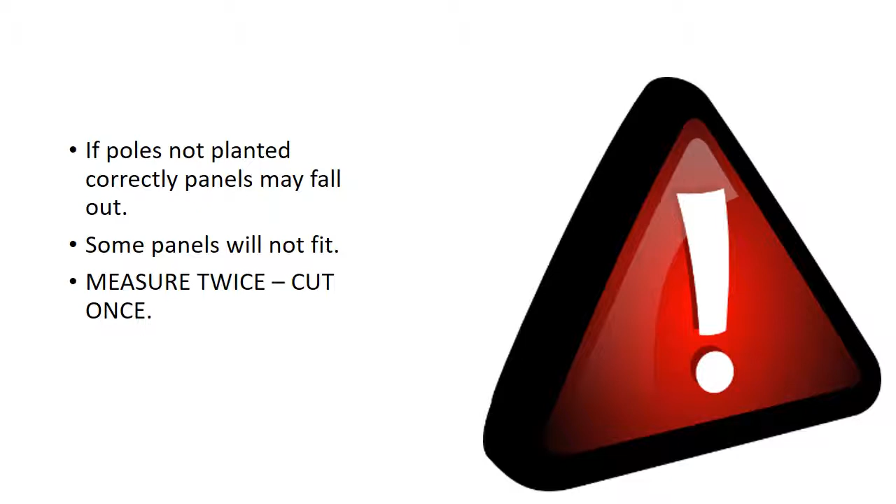Working with the poles and positioning them is very important, because if the poles are not planted correctly, the panels may fall out later, some panels will not fit. As the saying goes, measure twice, cut once. This applies here also.

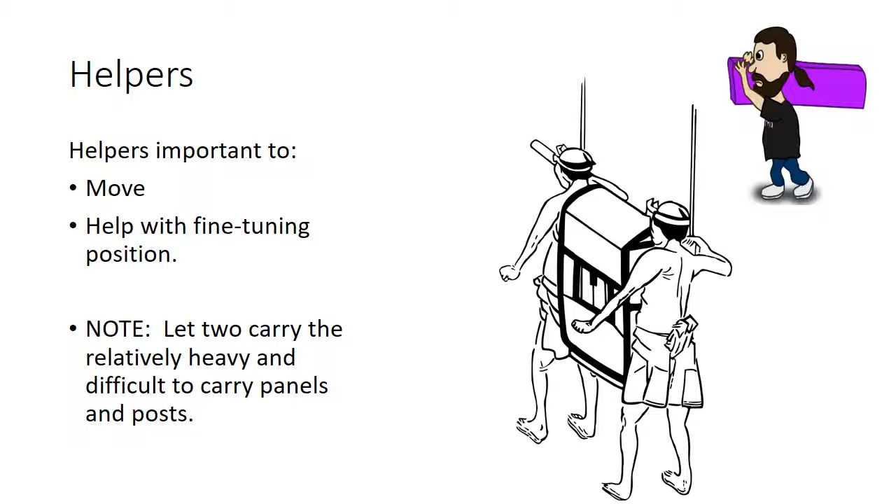Helpers are very important, because the poles and the panels are relatively heavy or difficult for one person to carry around and use. So have a helper, it's better for two people to carry it.

Note that you do need gloves if you're not used to working with it. Gloves are a very good thing to cover your hands for any small injuries that you can get.

Plant poles in a straight line - this is only a half truth, because you do not need only things to be in a straight line, you also need the poles to be at the same height.

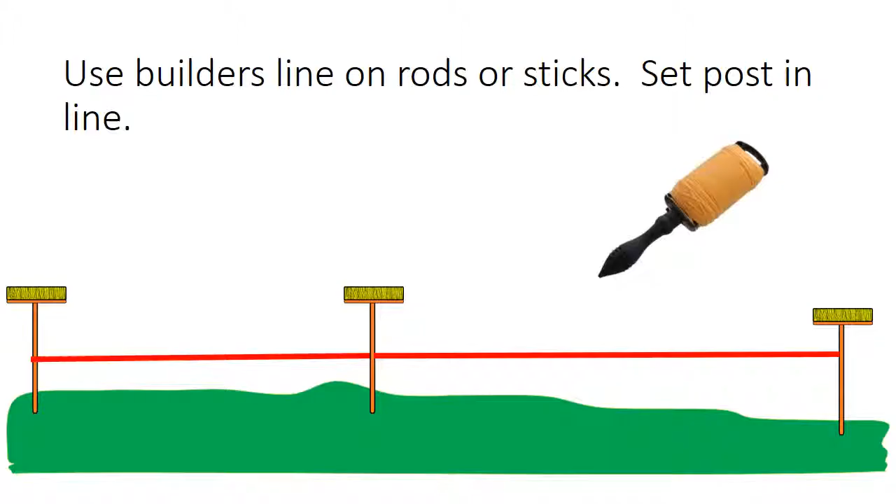To put poles in a straight line, just use rods or sticks at the end, and then you use a builder's line to connect it and plant the poles in that line.

To have the poles in a straight line and at the same height, this is more important for you. The highest pole and the lowest pole with builder's line on top, and then this will align the heights of the pole.

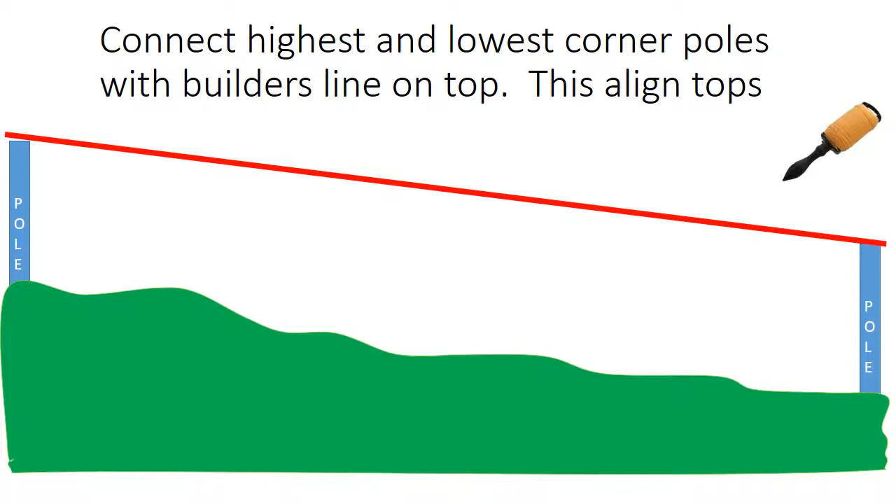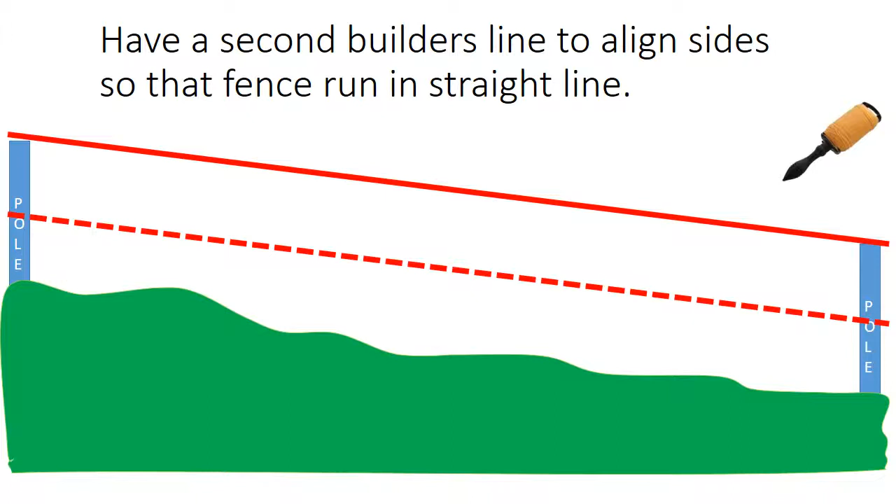Run builder's line on the side to keep it in a straight line.

How do you check if a few posts are at the same height? For 2 or 3 posts, you choose your spirit level, and if it's too small, you just use a long plank to put on top, and then you can see if it's level, one pole with the other.

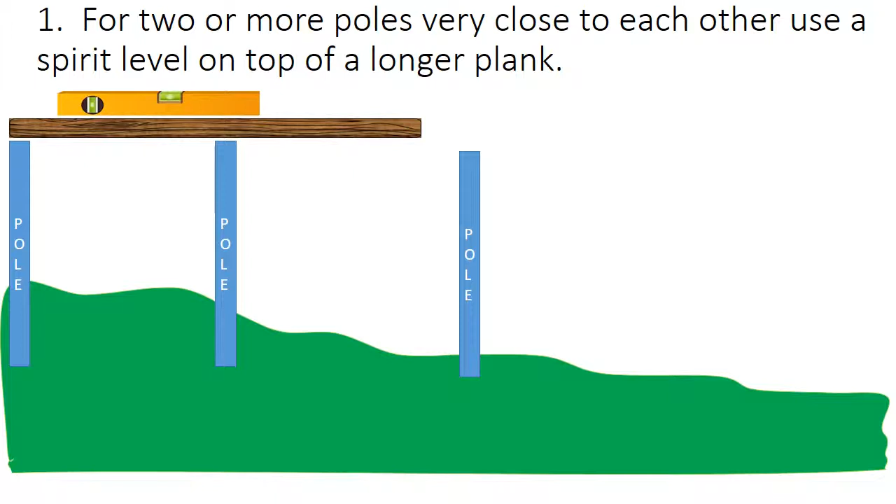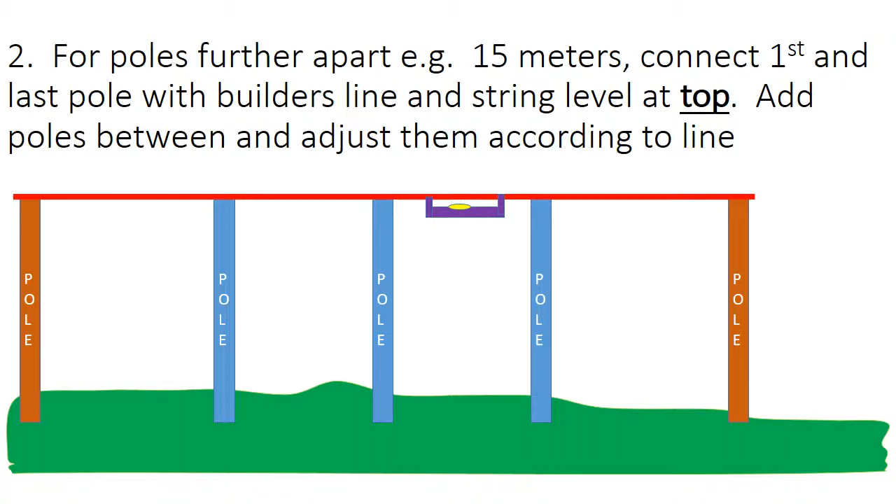If the poles are a little bit further apart, maybe around 15 meters or so, use a string line level that you attach to the string. Don't put the line closer to the bottom, to the surface, maybe at the height of your first panel. You just put the builder's line then with a small string level between the 2 points.

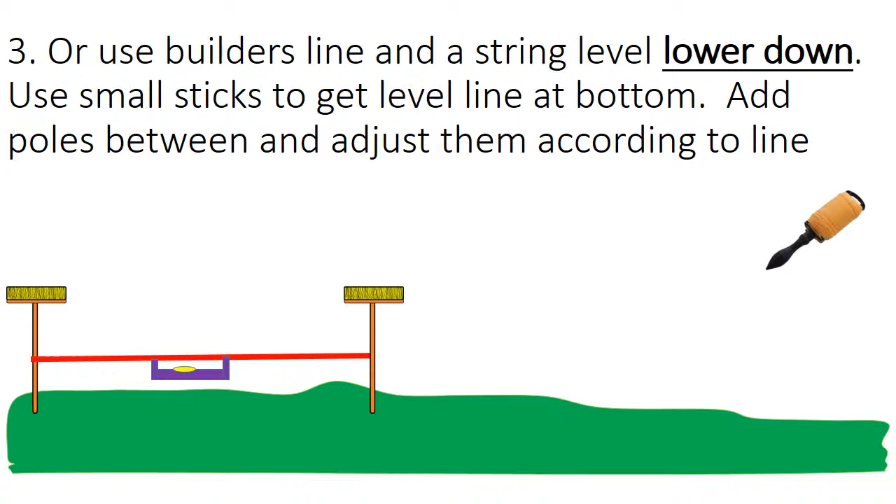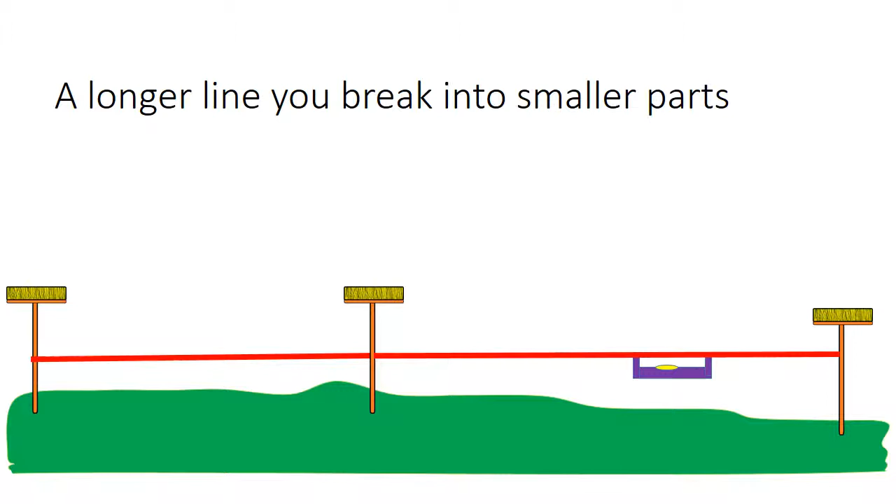If the section you need to measure is very far, first break it into a manageable part, level that first part so the line does not sag. Add another section with a pole, so that you can have a long line that is level, and you then level it piece by piece.

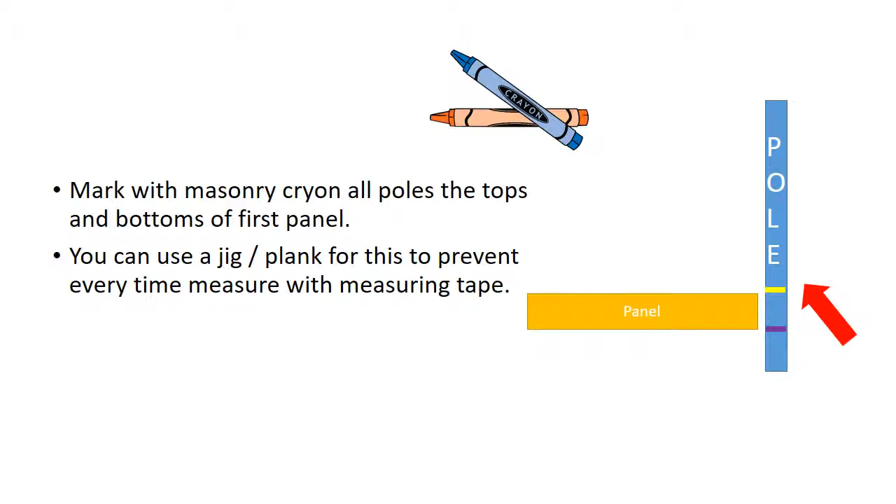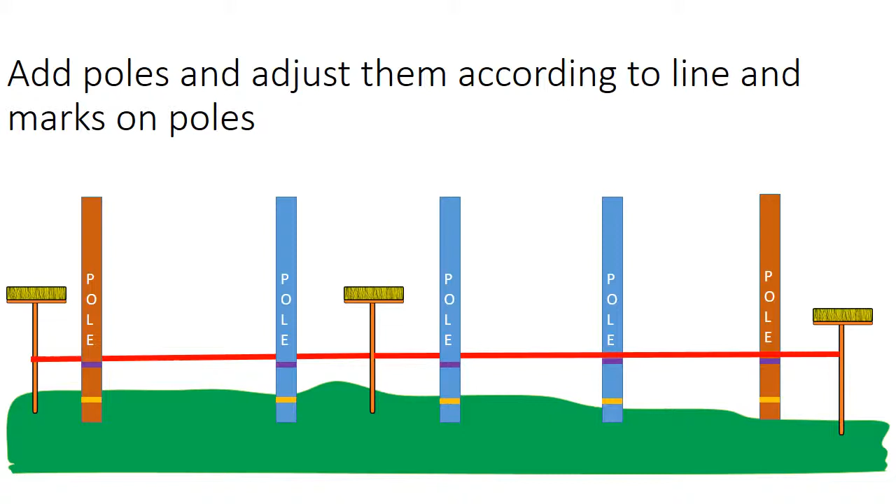All you then do is add the poles and adjust them to the marks, the top mark of the pole. You align the top mark of the pole with your leveled builder's line - sometimes people use fish gut also here. The line that you add, you simply adjust the top mark to that line.

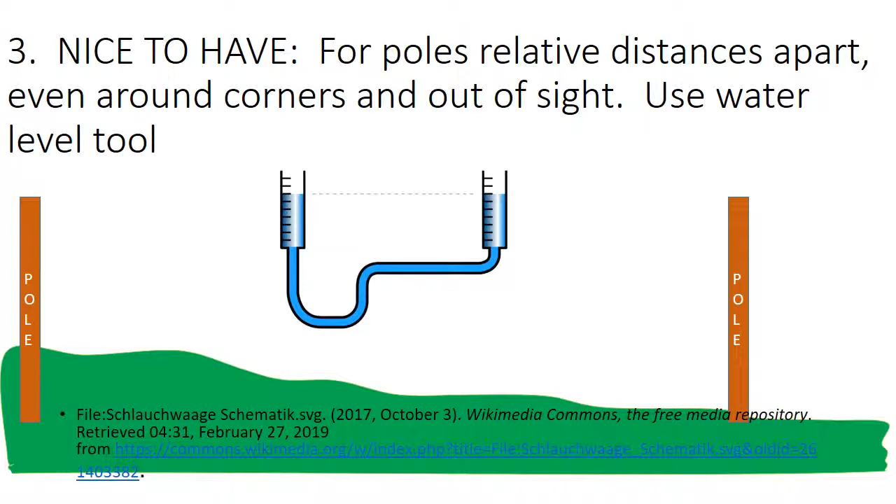A nice thing to have for leveling the poles, especially if it's far or sometimes even around a corner, is a water level tool. You can read a lot about it, but this is a really simple tool, not too expensive if you compare it to the digital tools.

Now, to plant a single pole to the correct height, everything starts before the planting. You can't put a heavy object in any type of hole and then expect wonders to happen. Things start at the beginning.

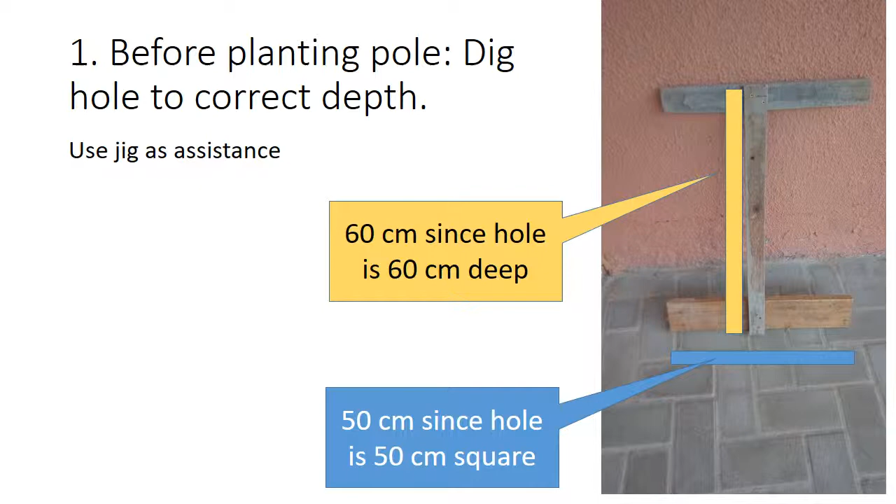First thing is you plant and dig the hole to the correct size. You can use a jig for this. If the hole is to the correct depth, you have already achieved a lot. In this case, I need to dig the hole 60 centimeters deep, so I make the jig 60 centimeters.

Before you plant the hole, make sure that the distance between your builder's line and the bottom of the hole is slightly longer than the distance you measured out at your post or pole, where the top of the first panel comes. The distance must be slightly longer.

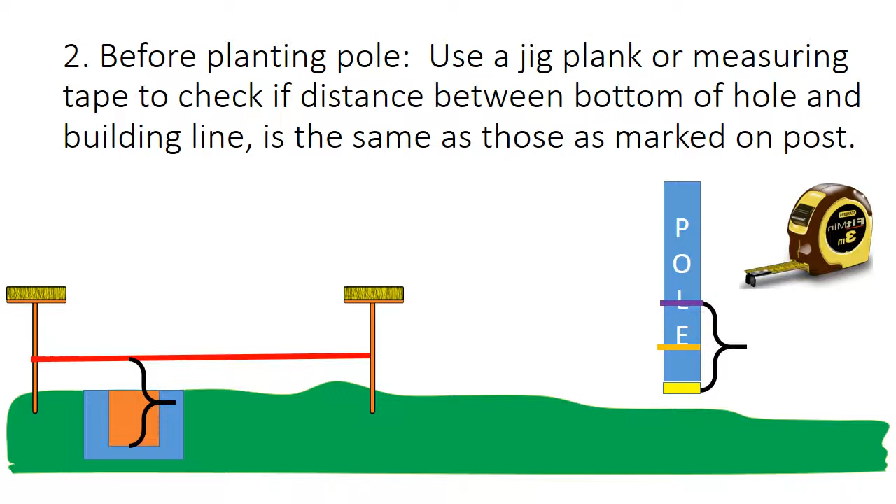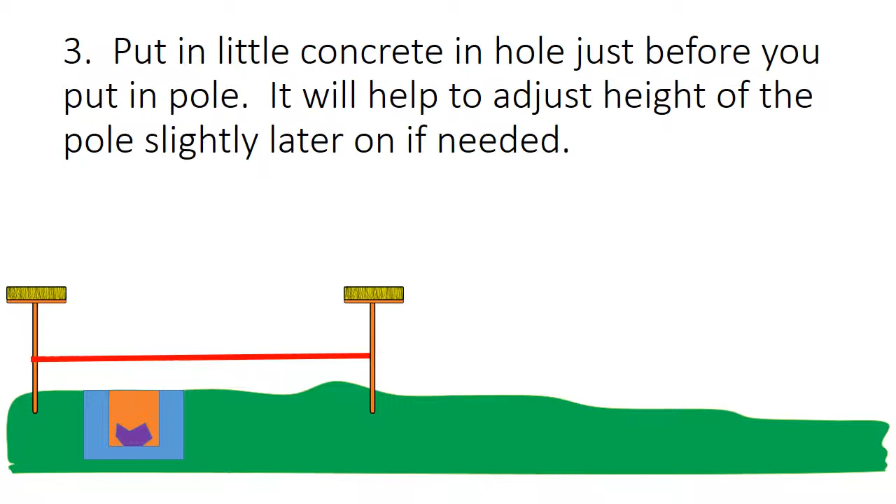As I said previously, I budgeted for 10 centimeters more. The reason is that you put a little bit of concrete in the hole first. This will help you adjust the height of the pole slightly if and when you need it later on.

The best way to put the pole in the hole - before we continue with how to adjust the pole in the hole, let us focus on how to put the pole inside the hole.

Slide the pole parallel to the builder's line, and slide it in close to the edge. In fact, you slide it in against the panel. Remember, you put the concrete at the bottom, just at the bottom.

Now you slide the pole in at the side, bring the pole in, and then when it slides against the end of that panel, as you push it, it will come upright.

Now you have it at a leveled distance. So you start with that. The fact is, now you will have to get the correct height of the pole.

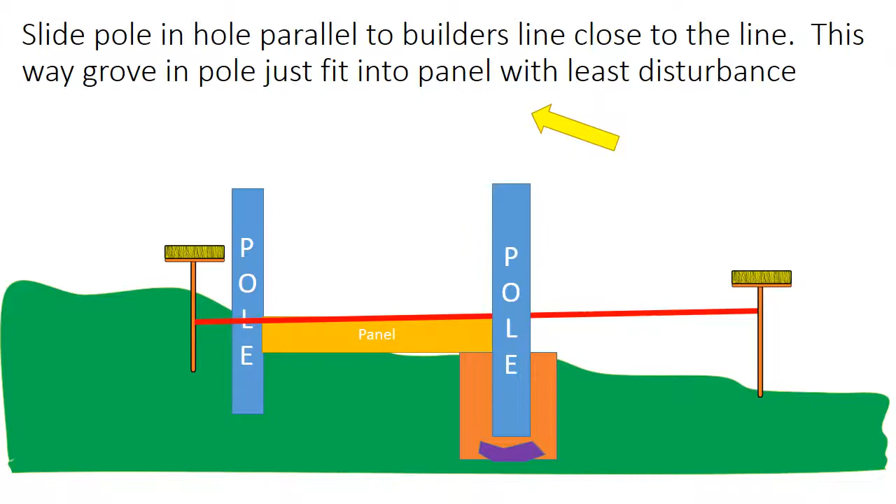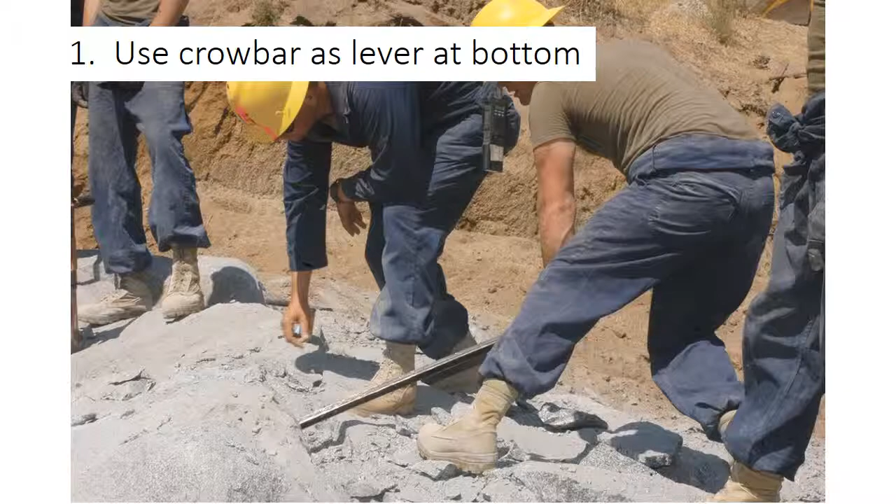For getting the correct height of the pole, you must know how to move the post inside the hole. Use a crowbar - as the saying goes, with a long enough crowbar I will move the world.

The crowbar should be used at the bottom of the pole. The reason is, if you do not use the crowbar at the bottom of the pole, you do not move the pole itself, but you just tilt the pole. If you try to level the pole like that, you get the problem that the distance is not correct between the poles.

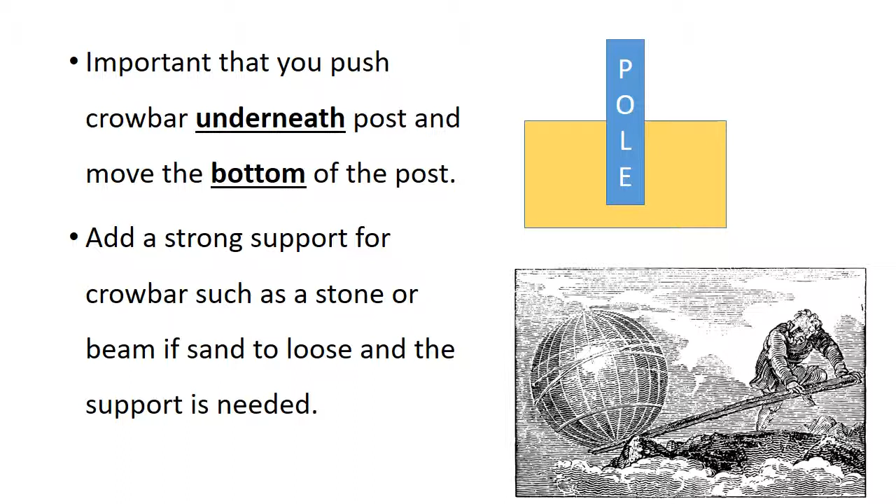So remember, do not tilt the pole when you move it. You move the pole itself at the bottom, both when you try to get the distance right and when you try to level it.

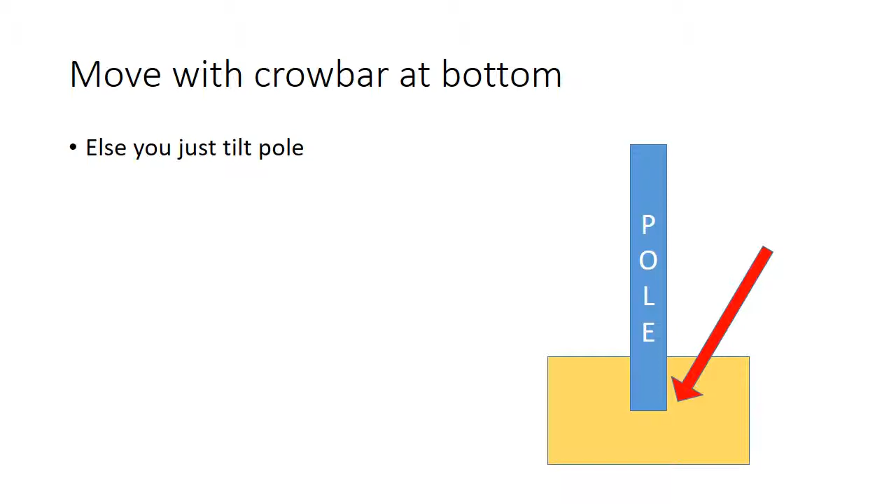It is a very good idea to get two types of crowbars on site. One is a bigger crowbar that maybe an assistant can use to move it around for you. The other is a smaller crowbar, though it is longer than this one.

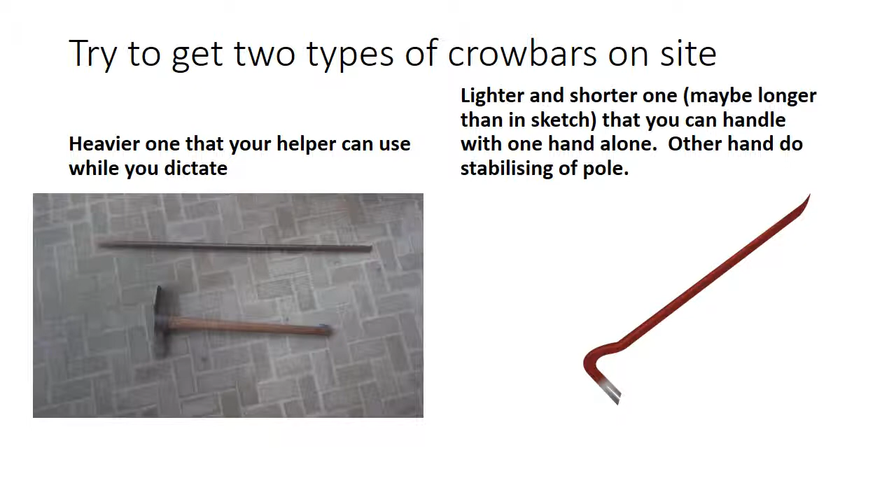I just use this for the purposes of illustration, but the fact of the matter is you must be able to use it with one hand. It will be better for you.

Now, how do you slightly adjust the height of the single pole after it is planted? Remember, the height is important, but it is of individual taste, because you do not do very fine work. It is work for outside, so there must be a tolerance. It doesn't need to be exactly on the line, but it mustn't be too much outside. So I accept a tolerance level of 5mm below or above.

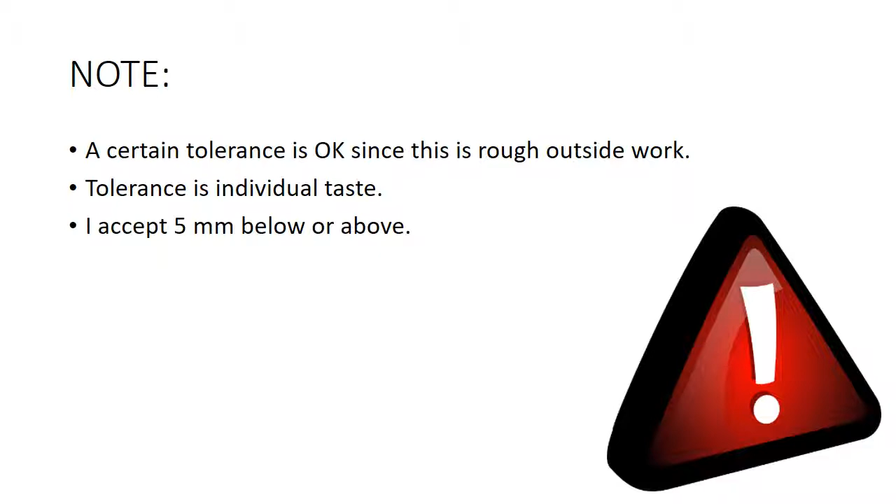If the pole is slightly too high for you, all you do is slide the pole slightly out of its current position, just slightly to the side. Don't move it too much, because the reason you need to slide it out is there's a groove - the pole sits inside a groove, and you just try to remove the pole slightly out of the groove. Once it's just enough out of the groove, you start moving it in a sort of drilling direction, from one side to the other.

In the drilling direction, try to make a slightly deeper hole in that spot. When you have a slightly deeper spot, put it back and measure again. Remember, you don't need absolute millimeter perfection, but it can't be too far off. There is a tolerance, and outside that tolerance level, you can't go. So repeat this if necessary.

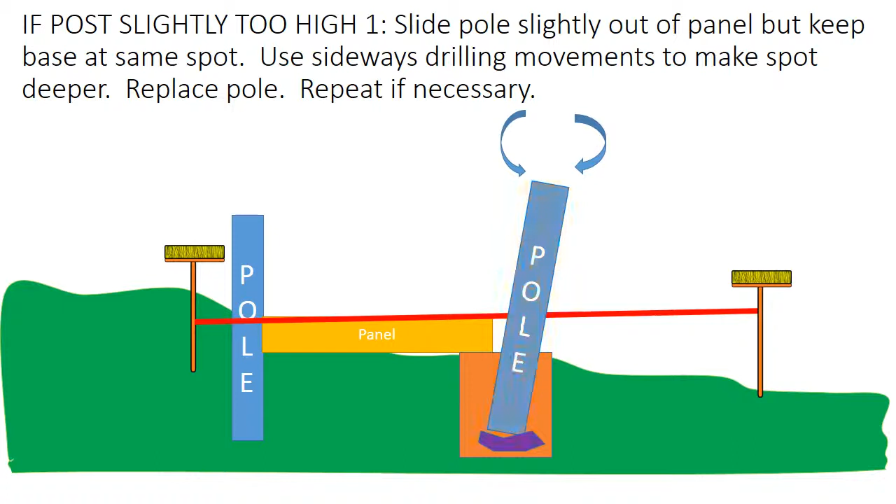The way to handle a pole that is slightly too high is to lift it and then drop it slightly, like a hitting effect, until you have the correct height. Repeat this as needed.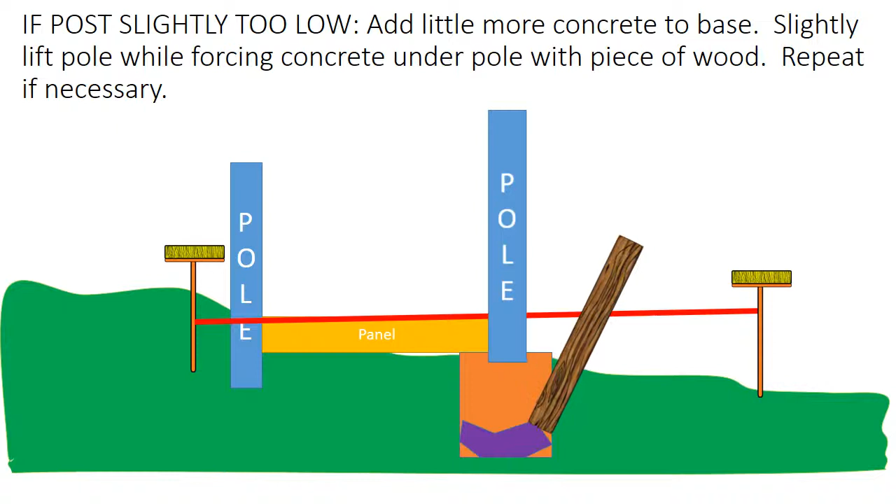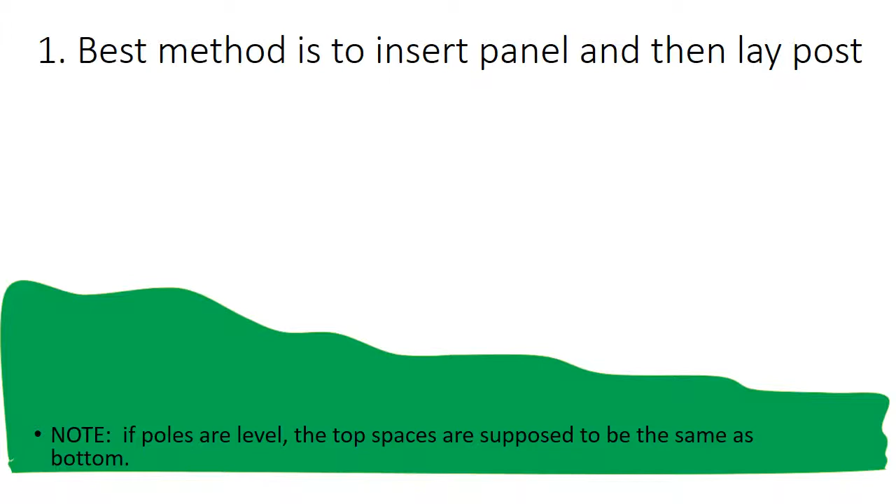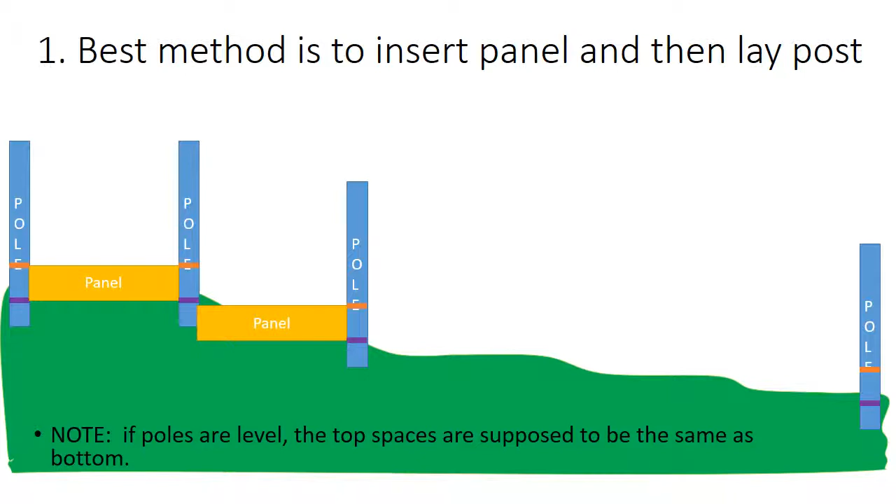Now, how to get the correct distance between the posts for the panels to fit. The best method is to insert the first and last post first, then insert the panel, then put in the pole parallel to the cut line and force it in. Insert a panel, then force the pole into it, and the panel into the groove of the pole. That is the best and easiest way to get the correct distance between the poles.

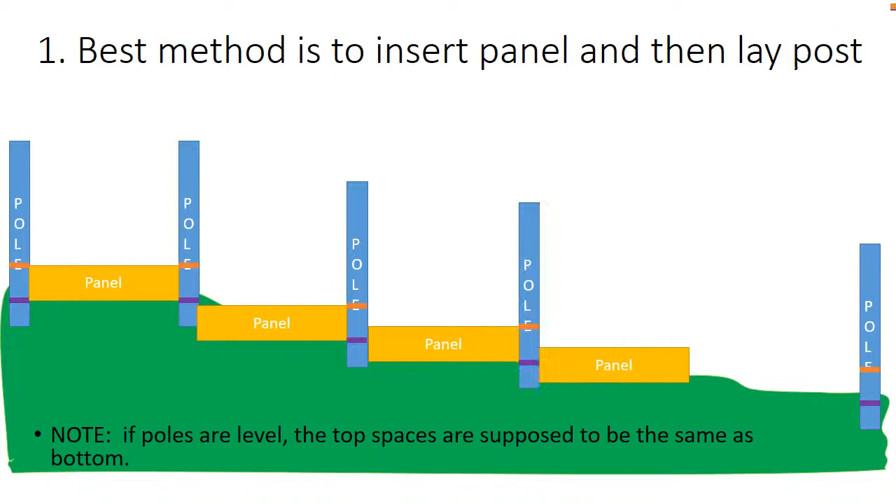You can also check the top of the space to see if the spacing is correct, then simply move out the board or plank that you put in. So you can be quite sure of the spacing, since you already leveled the poles. Both poles are leveled, and the distance assured with the bottom panel now comes as an additional check with a top plank of the same height.

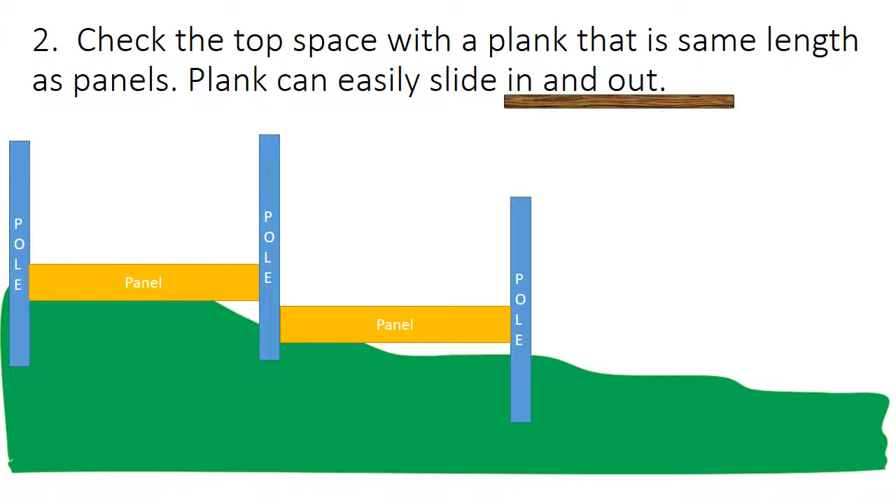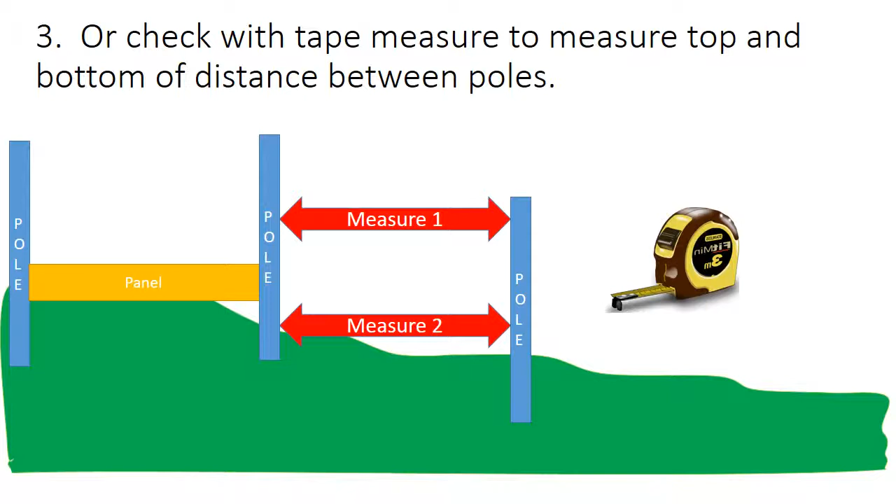I don't really want to over secure it, but you can also take a measuring tape and measure at the bottom and at the top. If both measurements are correct, then the poles are correctly planted.

Now, how to vertically straighten a pole. You use a post level. A post level is basically the best and easiest way, and it's not too expensive—worth the money and effort. You simply level one side and then the other. Remember to use a rubber band to attach the post level to the post, which frees up your hands.

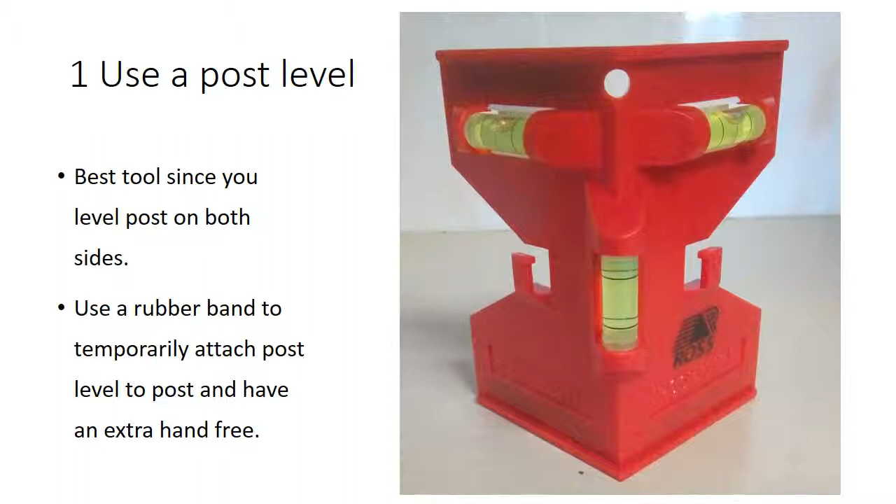You can also use the old trusted spirit level, which is not a problem; it just means you have to move it twice. If you want, you can also use a plumb line, but I don't really think it's necessary for me. Should you want to, it's an additional option depending on you.

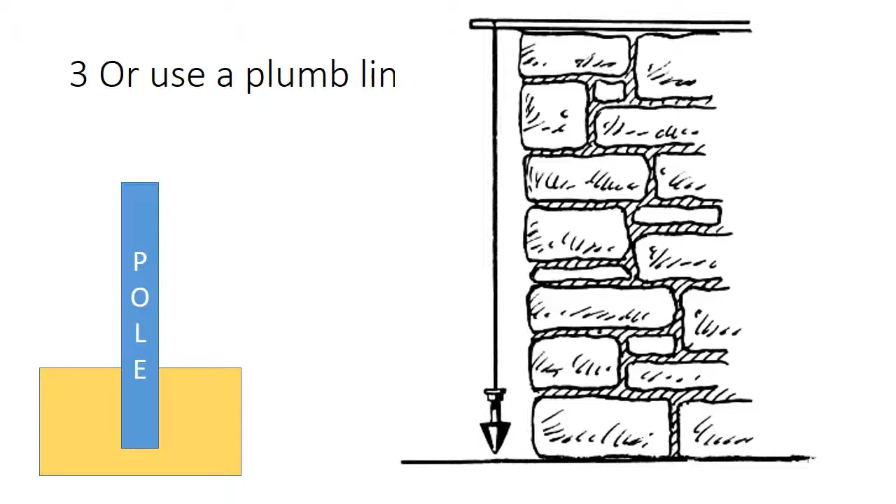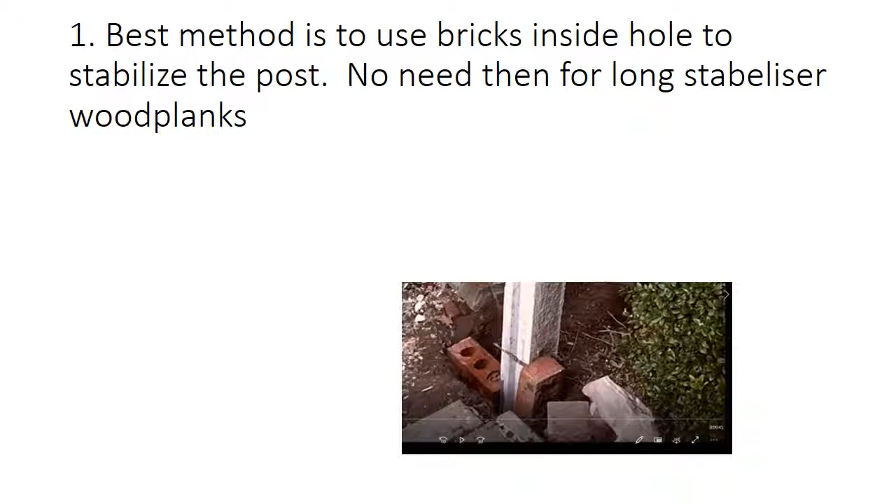Now, how to stabilize the posts while they dry. As I found, for stabilizing the post while it dries, just use a few bricks, force them in at the bottom, and these bricks are enough to stabilize the post. In these cases, it's not even necessary to have long stabilizer wood planks.

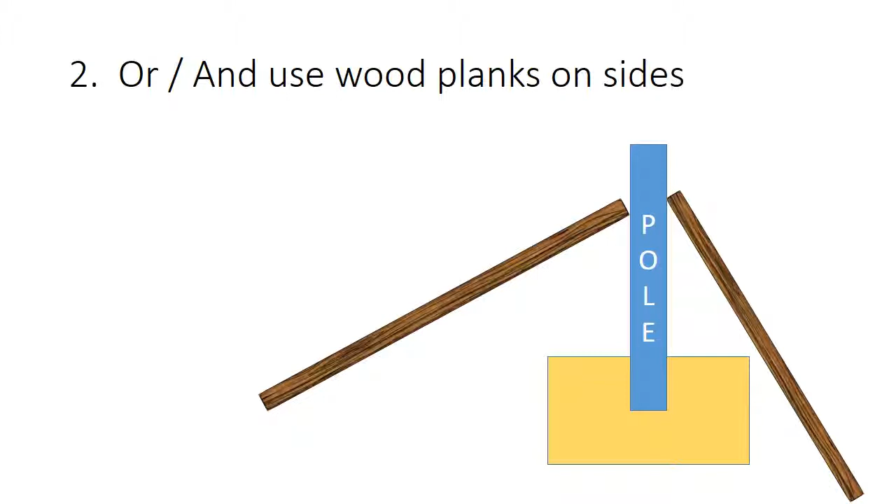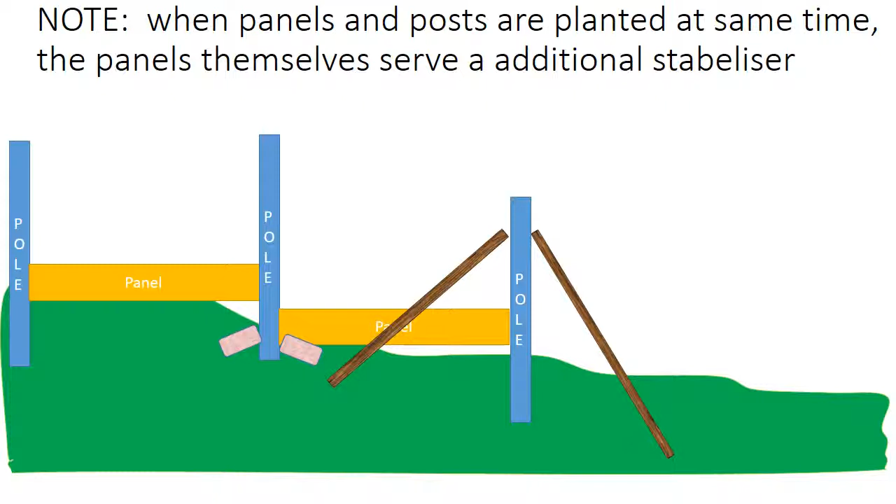However, if you really want to, you can also use planks that support the poles to stabilize them. You must remember that if you plant the panel and the post, an additional support for the pole is the panels themselves, which serve as additional support together with the bricks below and the planks.